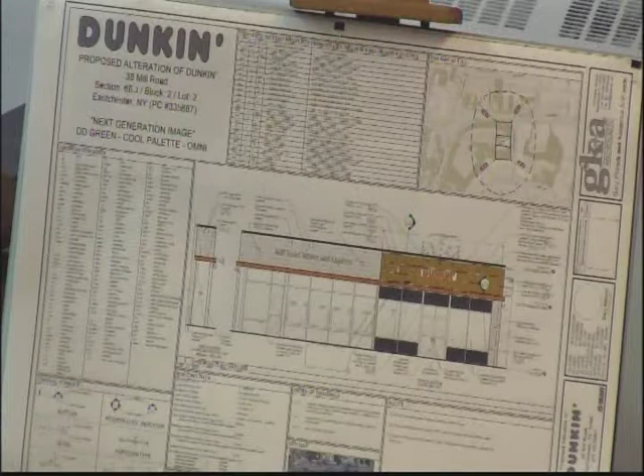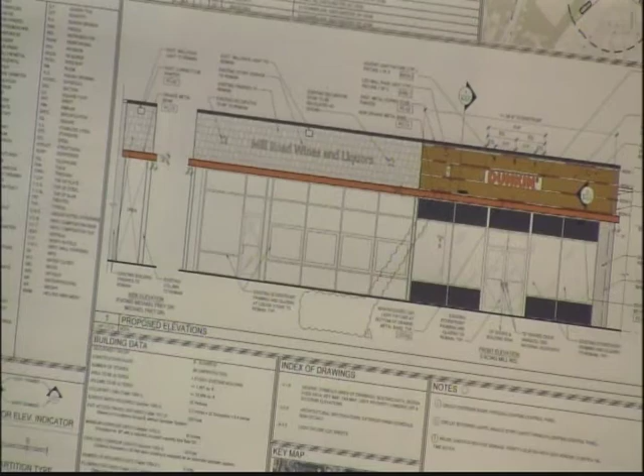There is a bit more information here than what was submitted at the sign committee, because the client wanted to improve upon the coping and also extend that orange band to the adjacent liquor store, just to make it a better looking facade, since that strip comes in and out, and this portion of the building comes out from the rest of the facade.

So just to maintain that continuous orange band, we continued it onto the liquor store, turning the corner about 3 feet in. I'm going to describe the improvements from the ground up. The existing facade has an awning which we're removing. There is metal material on the storefront, both at the bottom and at the top.

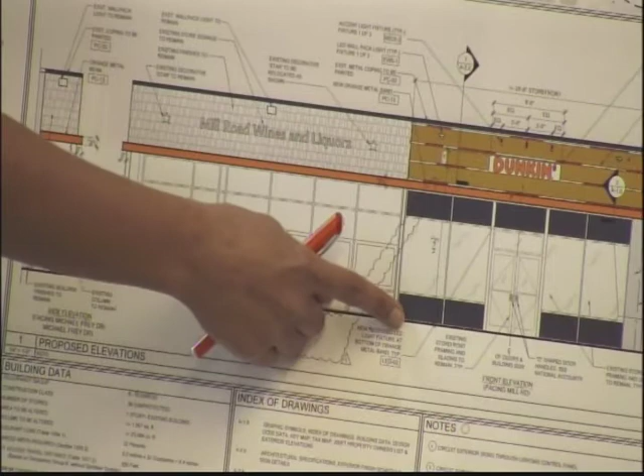We're proposing to paint that charcoal, which is one of the new Dunkin' colors. The orange band will be installed in lieu of the orange band that is currently there. If you look at the second photo I gave you, it shows the profile of what's there currently - an orange band with fluorescent lighting.

We propose to remove that and install this new orange band, which is 8 inches in depth and 9.5 inches in height. It has recessed lights on the underside to illuminate the sidewalk. Previously we had some lights at the top, which we removed since the sign committee had asked us to do so. So we do not have any uplighting, only recessed lights on the underside of the orange band.

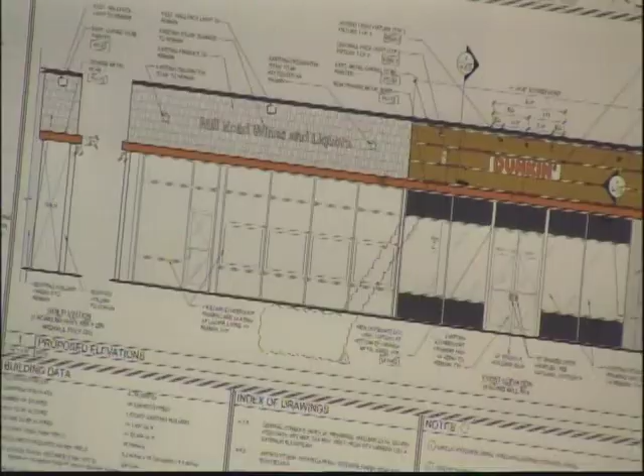At one point I thought you said there was both up and down lighting on the band, but the band is completely unilluminated, correct? Correct, the only lights are the recessed ones underneath that shine down.

And then the orange band, same thing - once it goes into the liquor store, we will not have uplighting, only recessed lights on the underside. You currently do have illumination there, which is fluorescent lighting, and that will be substituted by the LED recessed lights.

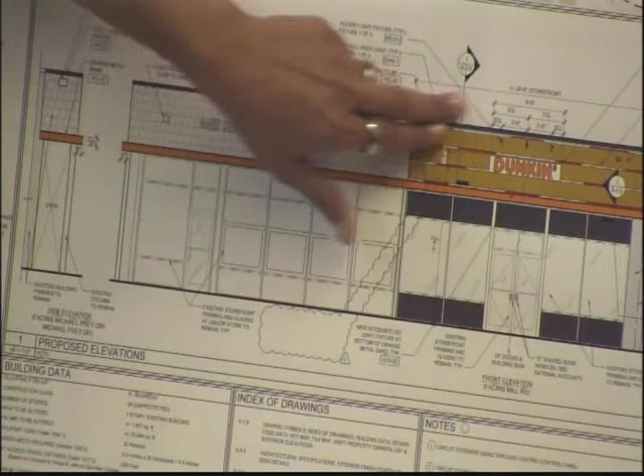Working my way up, this entire band is a combination of extruded metal and a wood print on aluminum material, and I have an example of it here. This whole thing will be made by the signage vendor to be mounted on the building by the GC. It is not illuminated - a series of white and pink stripes with a wood tone in the middle. Then on top, we have the existing coping, which will be painted that charcoal color.

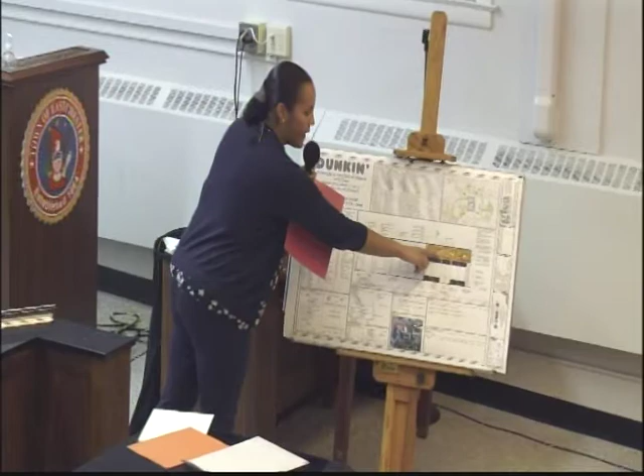The orange is the Dunkin' letter orange and also the orange band. This pink is what will be on the extruded metal. And then the white will match the back of the sign. And the charcoal color that I mentioned earlier is this one.

It's the PC2, I believe. That will go on the metal at the storefront and at the coping as well. So for the color, I'm really looking more for the color of the background part and not necessarily the sign. I think your first set is more helpful in terms of that.

And actually, I'm seeing the revised set here, that it's all in black and white. Is that what you guys got too? Well, yes. I apologize that it wasn't printed in color.

Okay, but it looks the same as the size of the Dunkin' sign. Is it the sign? Yeah, it's whatever was approved by the sign committee.

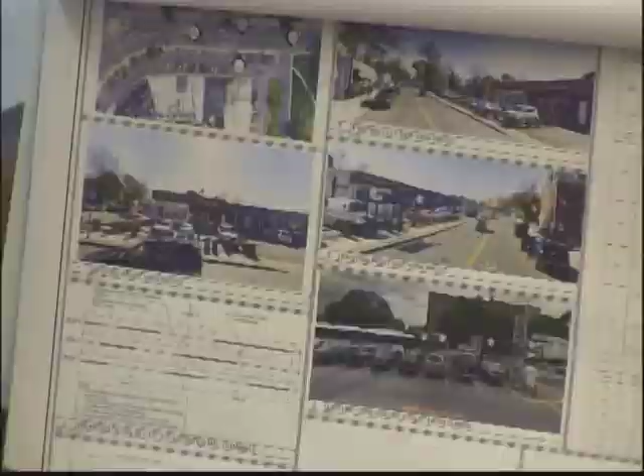If you go to the second sheet, it shows the size of the sign, which is, the letter height is 1.4, and the total backer board is 1.6. That was previously, I believe, 2 feet.

So we are showing the smaller sign. Okay, what kind of confused me was the original ARB application—the size looks the same. So is that what you had, the smaller one on the original ARB application?

When we submitted the sign committee package, we received the comment that we had to provide a conforming sign. So once we submitted to the ARB, we submitted the conforming sign. Okay, now it's making sense, thank you.

All right, so I suggest you look—in terms of how it looks, it's more helpful to look at the color one. Really, I guess the difference between this and this is the lack of lighting in certain places.

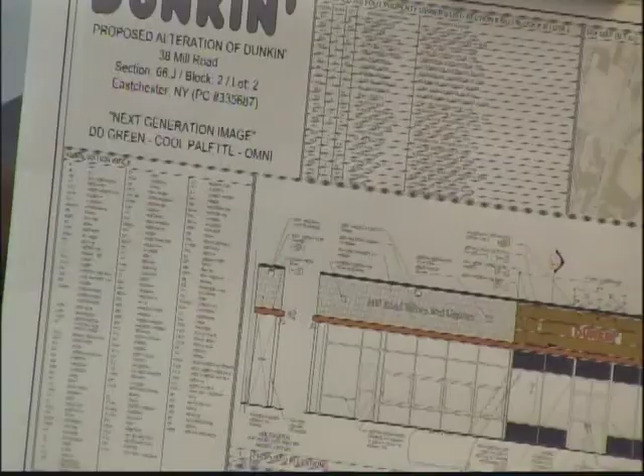Yes, if you look at the bubbling, there was an arrow pointing to light on the top of the orange band, and that is out. And also, if you look at the third sheet, there was a cut sheet there for an LED light strip, which we removed. Okay, alrighty.

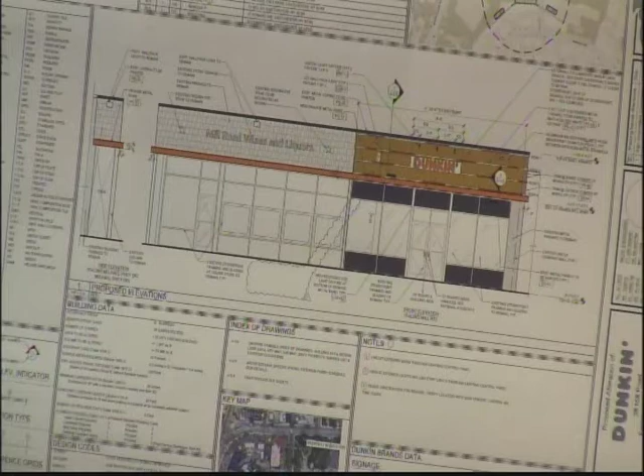Currently, you have 2 stationary trash bins in front of the store. Are they going to remain? They will remain. Okay.

We may change them to something a little—we will have trash cans, but it may be something a little bit newer than what's there. That's what I'm asking. You'll keep the trash cans, yes. Okay, but they could use an update.

And if you could include that, I guess, if we move this along. Yeah, I'll put that as a condition. So when they refer you to the planning board, then maybe you could provide a cut sheet, or they're going to request that you provide a cut sheet of a new and improved trash can. Okay, no problem.

And so now that you're extending the orange all the way across, will the liquor store still have the shakes? The shakes, yes. And the signage won't change, it's the same sign. It's just the coping will get painted and the orange band will go straight across.

So, but this appears large. Is it 8 inches? No, that's the overhang. What's the dimension? 6.5? The height is 9.5? Yes.

Is it 9.5 now, or does it appear smaller? Right now it's smaller, but since we're taking off the awning at the Dunkin', there will basically be a blank fascia there, so it'll be a filler.

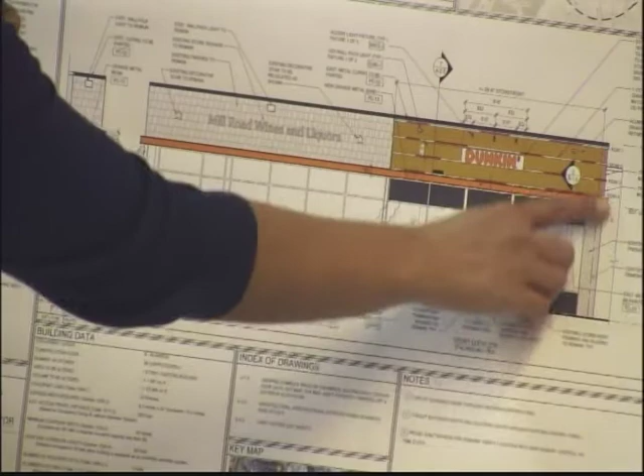Yes, but what you need to take into consideration is whether or not you're on your property line, because this looks like you're actually past the property line, the way this is rendered. Where it says storefront, that line that comes down looks like you're past the very top 8-inch dimension of the storefront. Yeah, that's the center line of the demising wall.

Right, so it looks like you're already over that. Yes, but the actual facade is a little bit over. That's why, but what I'm saying is I don't think you want to go any further than that. No, so we'll stop it right here, where the storefront ends.

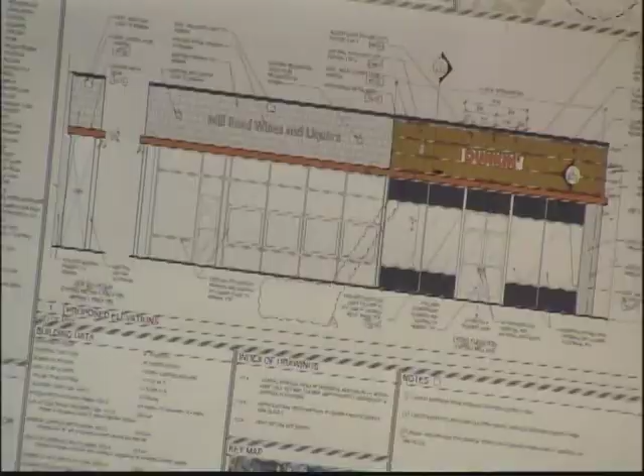You said you had a sample of the wood tone, I think? Yes, that's what I gave you. That material is a fiber cement material, which is the prototypical one. Your wood tone's going to be smooth though, right? Not quite, because that has relief. Ours will have the colors but won't have the texture, and it'll be all light gauge aluminum material, so it won't be as heavy as that fiber cement.

So it will have color to look like wood? Yes, like a laminate kind of thing, because it won't have that texture. Right.

Any comments or questions, guys, from that?

One thing we did not mention at the sign meeting, I just want to throw it out there. I don't know if it really needs it, but I know they had come to the sign meeting with a much larger sign, based on replacing the square footage of the sign because it got smaller, but this is what conforms to the sign law.

And another thing you are allowed to do is a blade sign. I don't know if it really lends itself to this facade or whatever, but we find they are very, very helpful in terms of pedestrian traffic. It's just one more way of putting it out there.

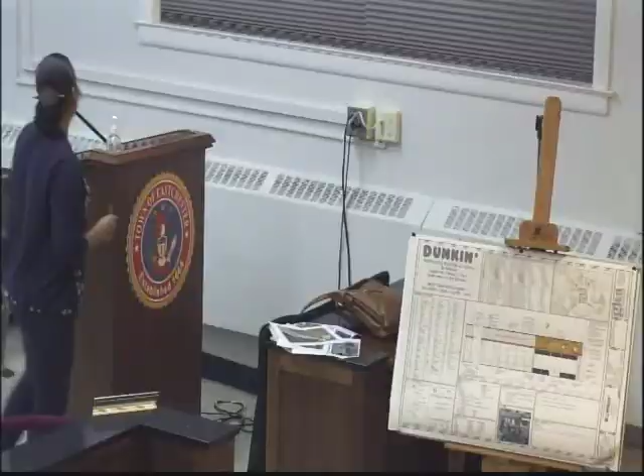Very good, thank you very much. Oh, and do you want your samples back?

Would you want your samples back? You can bring them to the planning board meeting if you like. The one right there, the wood. Oh, the wood, here's the wood as well.

Oh, you can give that to Margaret for the town copy. Sure, that would be helpful. And then I'll take these photographs if you don't mind. Thank you, I'll take all of this.

Okay, and while we're doing that, our next application is application number 21-31 for 2 Eastway.

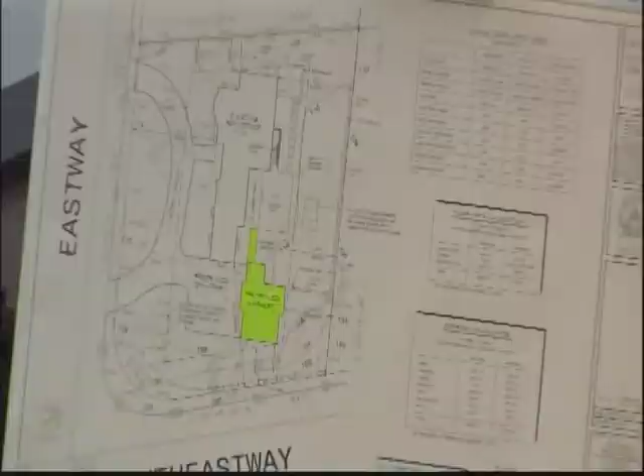The proposed scope of work will include the construction of a one-story garage, highlighted here, at the side and rear of the existing residence. The garage will have a breezeway which will connect it back to an open porch at the rear of the property. We're also proposing alterations to the existing circular drive to provide access to the new garage.

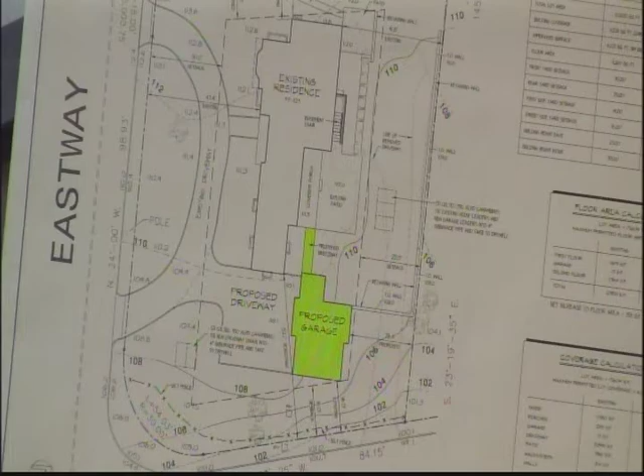Here is the street facade on Eastway, showing the existing residence and then the garage beyond.

On the garage, we basically tried to pick up the details that were in this gable end and the gable end at the rear of the house, and bring in the trim details there. The hip roofs we picked up from the side of the house, and then the stucco. Not as much happens on the front facade, but there is on this area, and the entire back is mostly stucco. So we picked up all those materials and brought them into the garage building.

This is the view from Southeast Way. The house beyond, and then the garage. The property kind of slopes off towards the corner.

And then here is the rear view, showing the garage, the breezeway connected back to the open porch and the remainder of the existing house. This is the view next to the proposed breezeway. The roof of the breezeway is cut away, and that's the section to the existing family room.

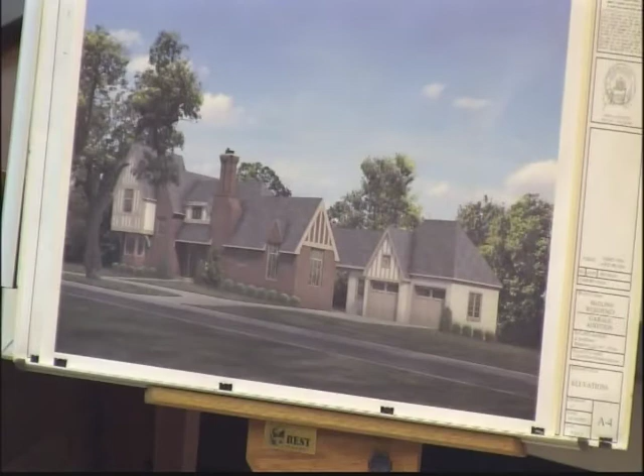This is a rendering showing the existing house in relation to the garage. So here is the existing house and then the garage. As far as the materials, we're matching materials on everything.

The wall surfaces will be a 3-coat stucco in a beige finish to match existing. The roof will be slate to match existing. The trim boards will be AZEK painted to match existing. The windows will be vinyl clad to match existing, the color to match existing. The gutters are gonna be copper to match existing. And the overhead doors will be either wood or fiberglass painted to match the trim work and the siding, which happens more on the rear of the building.

I have samples of the materials, which are pretty typical materials. I can hand them over. I might have given it to you already. Texture, painted, and then the garage doors. She only gave us one.

I'm happy to answer any questions that you may have. I just have one comment.

On the gable over the garage door, you're not saying how big the AZEK boards are, but I would definitely want them to be very similar to what you have - not a 5/4 by 4, it might be 5/4 by 6 or by 8. Yeah, we're gonna try to match what's there, because the boards on the existing house look like they're 8 or 10 inches wide. The only thing is this is much wider, so we'll probably try to match the upper part of this gable here, or even this gable here. Try to keep it the same size - that one has brick in between, and this one will have stucco. But yeah, we're definitely gonna try to match the size of the existing house.

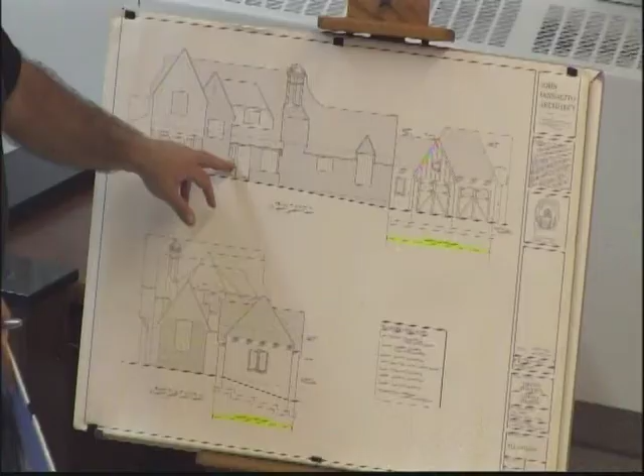Is there any other lighting on the house existing now? The porch that's covered here has recessed light, and at the back I believe there's a light at this door here, of this patio - but nothing that you could tie into, is what I'm saying, as far as lighting goes for the garage.

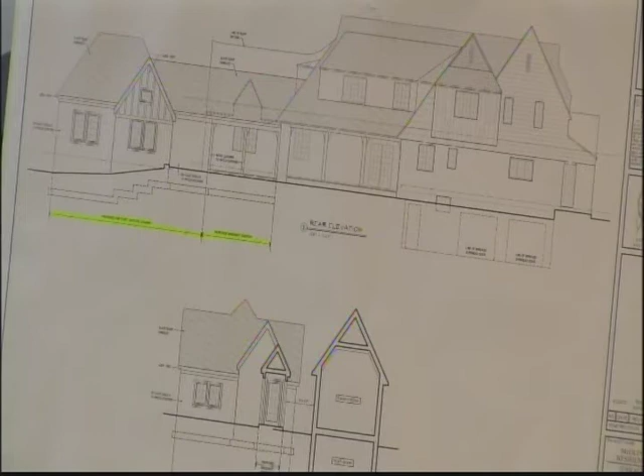Yeah, we'll try to match what's there. Mike, do you remember what kind of light you have? There's floodlights in the back, and there's a lantern at the front door, like a black cast iron fixture - that's kind of neat. Yeah, so we can try to match that light fixture, or something similar to the one that exists out here. I think that'll look nice.

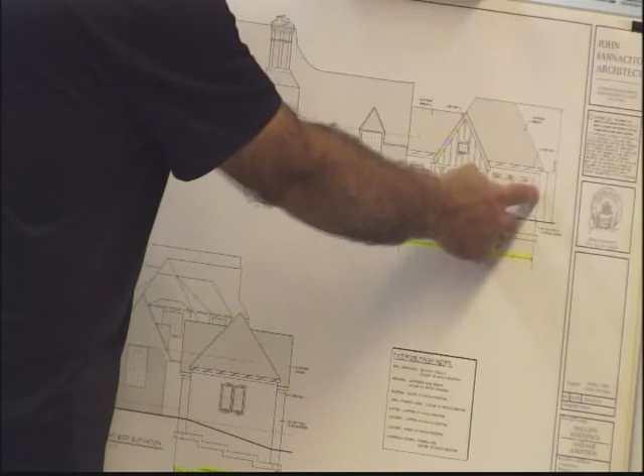And on either side of the garage doors as well? Yeah, so that's what you're gonna do. We'll probably do at least one here, and then if I can fit one here and here, or we'll just do the outside edge. Because that recesses, right? Yeah, that one sets back - not much, I think it's a 2-foot setback.

You see it more on the rendering. It's a 2-foot setback with the front, just to create that gable. Also, because that house is probably built in the mid-20s, typically somebody uses an 8/12 pitch, but try to match what's there - it might be a 10 or 12. This rake board, we'll definitely match those details. It's obvious by the use of materials, the slate and everything else, that you care enough that this fits in with the house itself, with the neighborhood, and we appreciate that.

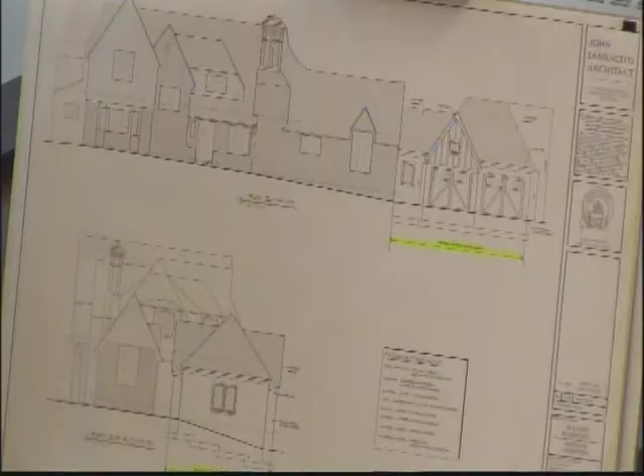It's gonna look like it always was there, as it should. The rendering looks like it's already built. These renderings are getting more amazing. I just like the colors on this one better, they're a little more subdued. That one's a little cartoonish. Ours looks great. That's a sunny day, the sun setting in that one. It looks nice.

The bushes, pretty much those are them. I sent them photographs of the house, so maybe they tried to render it. Everything, I keep it, it's amazing. This outfit's out of North Carolina - I send them my drawings, and then like a week later I get a render. It's great, really nice, can't beat it.

This stone wall is also pretty beautiful on the project site, front and side. Is that the stone wall to the adjacent property driveway? I'm not sure exactly what I'm looking at there. That's another house, is that what that is? The house next door - this wall here at the very back has like a 6-foot drop to their backyard. So that wall runs across the whole property, they see that from their yard. It has nice character, looks like it's been there for quite some time.

That's one of my favorite neighborhoods in the Eastchester area. It is quite nice. Sorry for all the people on Lake Isle, it's a whole different era. I've just lost all my clients. It's a different - yeah, that whole area has character, 1920s period, it's amazing. That's why.